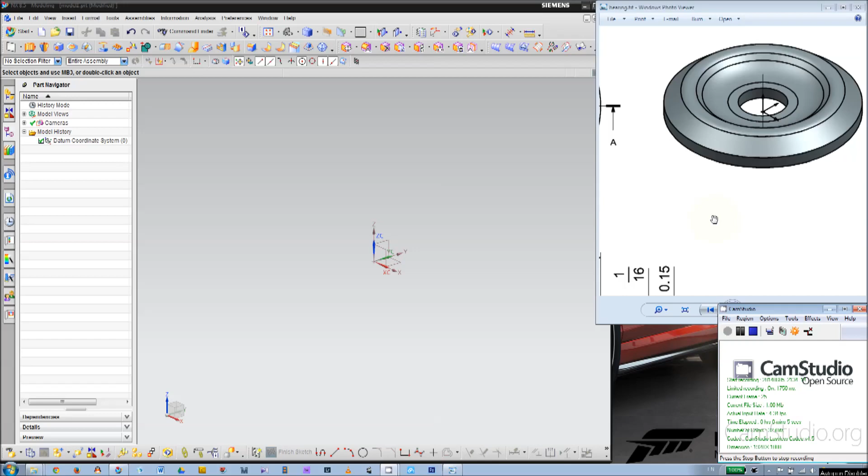Right, this is Shane, and it's a video for this bearing cup. As you can see in this drafting, the sketch is kind of confusing, so I'm gonna show you how to make this part.

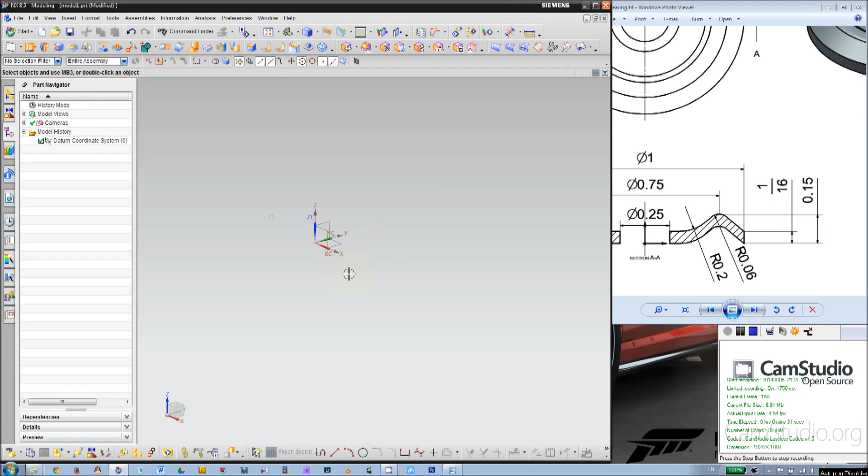As usual, you want to build a new file, a modeling file, and make sure it's in inch. Once you're in there, I'm gonna create a new sketch. Usually we think that z direction is the direction of height or thickness, so we will create this sketch on the YZ plane.

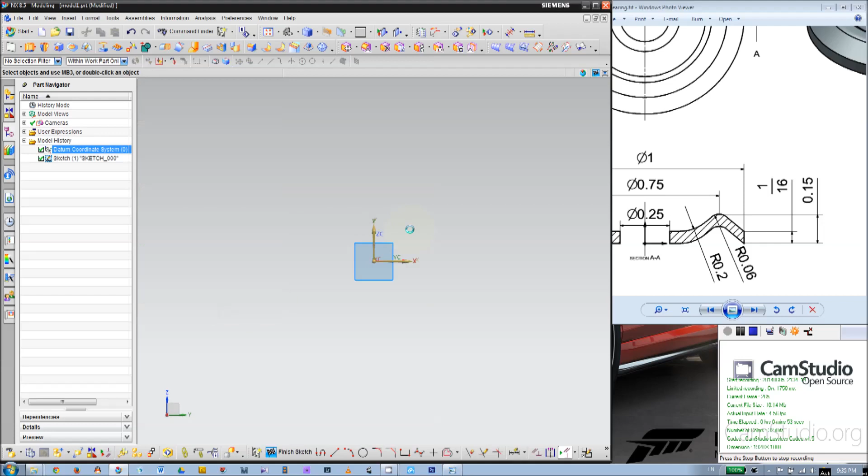Now in this YZ plane, we can start the sketch. If you look at this geometry, this is first it's revolve, and you probably can make this maybe extrude, but it seems to me it's quite a lot of work. So revolve, you only need to draw this half.

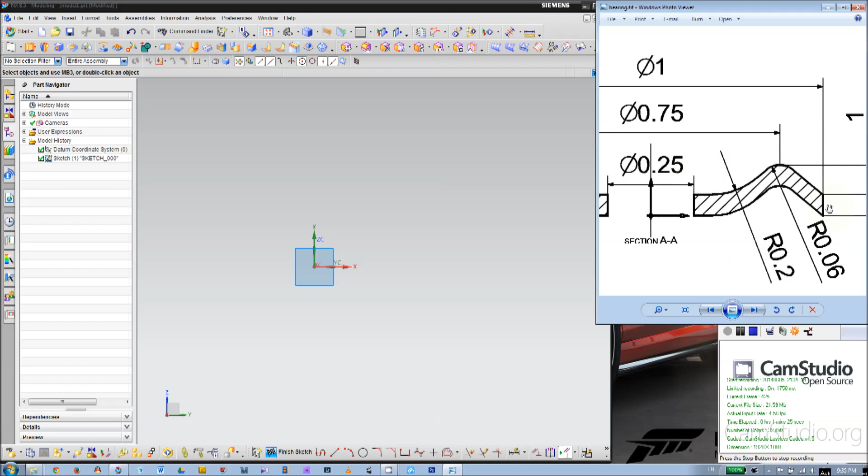About the hole, you can leave it to the last. You can extrude another cylinder, or you can make your sketch exactly like this cross section here. Alright, so that's the idea.

Let's first start. If you look at this, it's made out of sheet metal, so it should have uniform thickness across this cross section, which is 1/16, and that's what you want to make sure they have the same thickness. We will start from a rectangle from this left side to the right side.

So if let's say we choose to revolve without the hole, I'll start from the origin. Then the width will be a half of this 1 inch, so it's going to be 0.5, and the height will be 1/16.

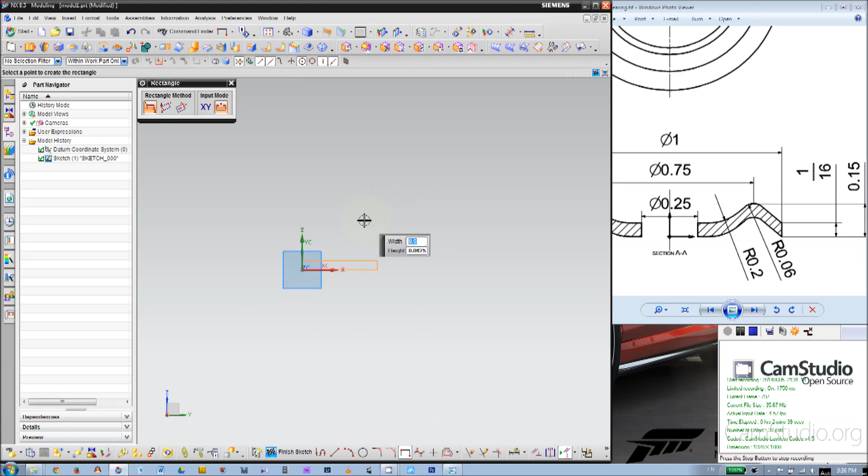Since the width moved, I need to re-enter this. Now it's there, the shape is fixed. So just a click, then you can have this rectangle.

Then we can start making this bump. I don't know how to call this, but basically this is two straight lines first, then you can make a fillet. As to this big arc here, I would use edge blend instead of fillets.

The reason is if you add another fillet here, it's probably gonna bring in a lot of under constraint. If you're fine with an under constrained sketch, then you can do that, but it's better to have it fully constrained.

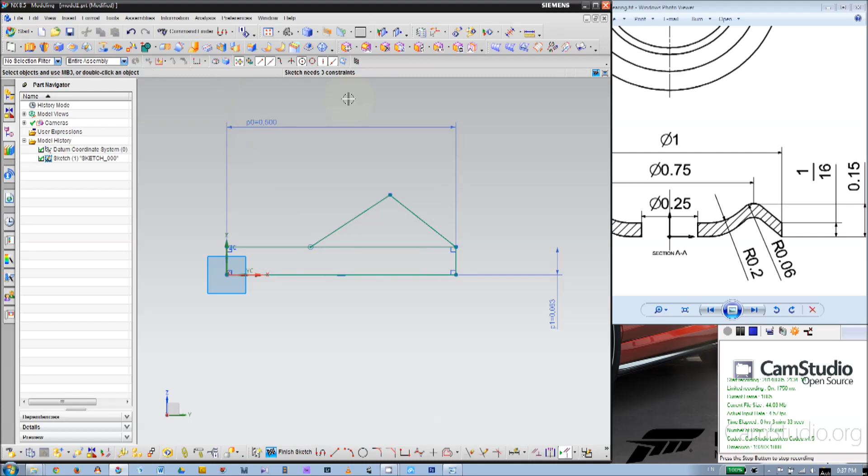Now for this bump, we have this kind of triangle here. We can add, first we can add some dimensions to define the shape of this triangle, or you can fillet first. I think fillet first is fine.

So radius 0.06, and hit enter. Now we can click this corner.

Now if you look at this 0.75 diameter, that's actually from the center of this arc, or rather the center of this - yeah, that's the center of this arc. I mean this center, not the midpoint.

I'm gonna add this from here to z-axis. Well, actually it's y-axis, it's the absolute z-axis. You're looking at the top, and the YC is your sketch axis. So that's the same thing here.

That's gonna be 0.75 divided by 2. And now you can tell it's skewed.

If you want to, I want to make this have the same angle on both sides, because underneath here you will have a ball for this ball joint, ball bearing. So you want those two sides to be at the same angle. So how do we make that?

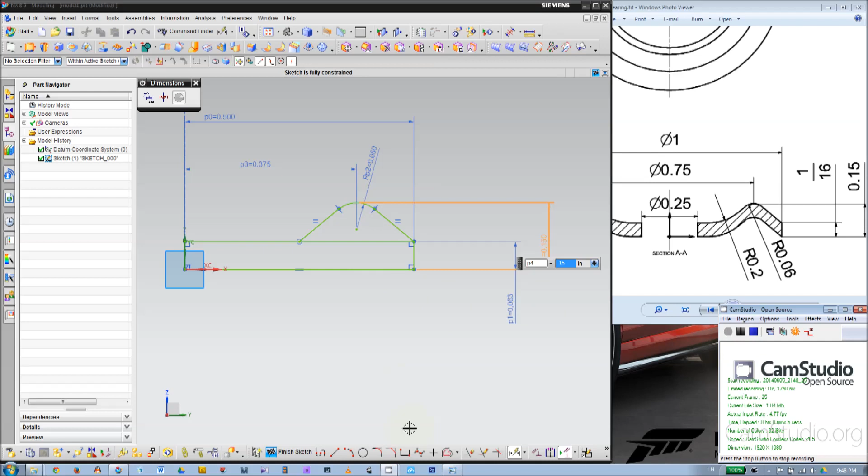Next, you just need to trim this off. So we can use quick trim and take this out. Then that's all for the top. Yep, that's all for the top.

You don't need to fillet this, or we can do that later. Let's finish the bottom, so that's exactly the same as the top.

So I'm going to make this triangle first. Then you can fillet this 0.06 for this corner. Then probably need to put another dimension for the center point of this arc to the axis.

To y-axis, you can make this equal to P3. So next time if you want to change, you only need to change P3.

Alright, next, make them equal. You don't have to go there for geometric constraints. You can simply click - notice you have this quick menu here.

So if you click one line, you would have some possibilities, those possible constraints you can apply to this line. And if I click the second line, you see the constraint changed. So between those two lines, we can have those relationships, or they can both be horizontal.

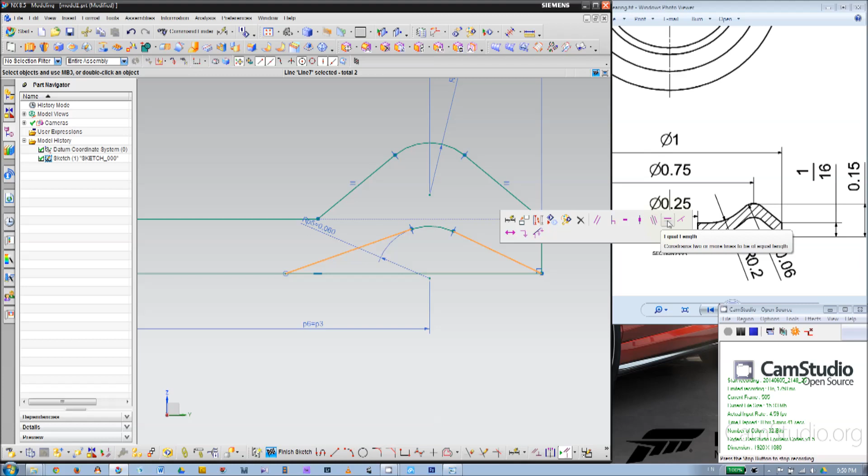So let's make them equal, which is here, equal length. And you have this.

What's the difference here is pretty obvious, and because this is sheet metal, you want the thickness to be constant everywhere. So obviously it's too thick here, so we can use another constraint, another dimension between the two centers of the arcs, make them the same as P1, which is the thickness of this sheet metal.

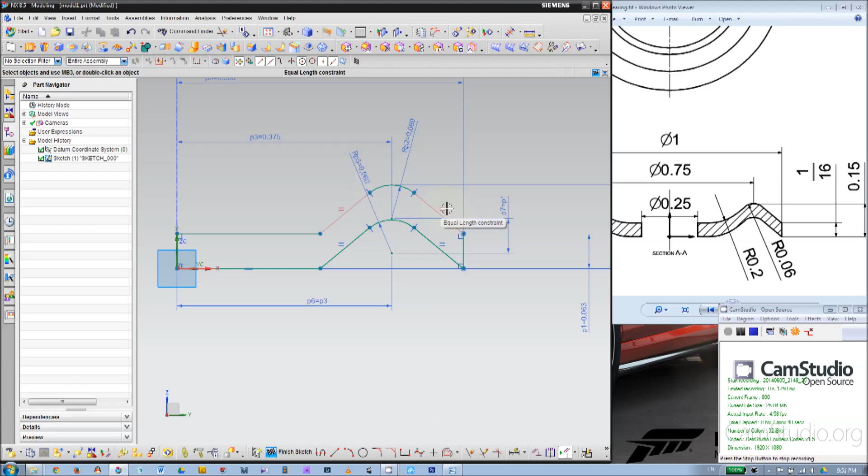Okay, so that's done. We can also trim the bottom off. Now it's fully constrained, and we don't need too many dimensions to fully constrain this sketch. So let's try to fillet this 0.2 inch.

Click this corner, click that corner. They all look fine, except I need two constraints. If you activate this infer dimension, you see this section is actually not constrained. Why? Because this line, this straight line, and that line were equal before, but now since we made the fillet, they're not anymore. So how do we constrain them now?

You can calculate how much this would be. Let's see, maybe put those two on a construction line, put this vertical, or put another construction line here, make this construction line equal to this line, and okay, I'll do it just from this line to this, and this is the original line that got filleted.

So I'm going to turn this to reference, and we need to add some constraints. First, of course, is make them equal, which is here.

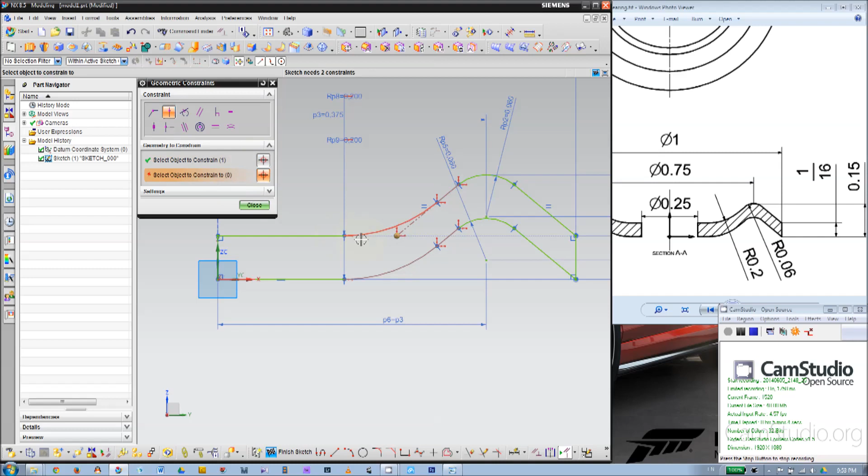Of course, another thought is you can mirror this to the left side. That should do the same thing, but I'll stay with my plan.

That is good, and we can make another line for this bottom here, and this should be a little bit easier to see how this point is not on this curve. So this is the curve, that's the point, and let's make them equal. Pick this line, pick that line, pick equal length, turn this to reference.

Now it's fully constrained. Sometimes after this step, it's still not fully constrained. Why? Because this line and this solid line are not collinear, meaning this line can actually steer away from this short line. So you might need a collinear constraint here. But since we talk about edge blend, I'll just leave the bottom without the fillet.

Then make the top as the fillet. So here we can make this back to the sharp corner, and you can use quick extend. There's a better tool called make corner. You can let two lines that are not parallel make a corner.

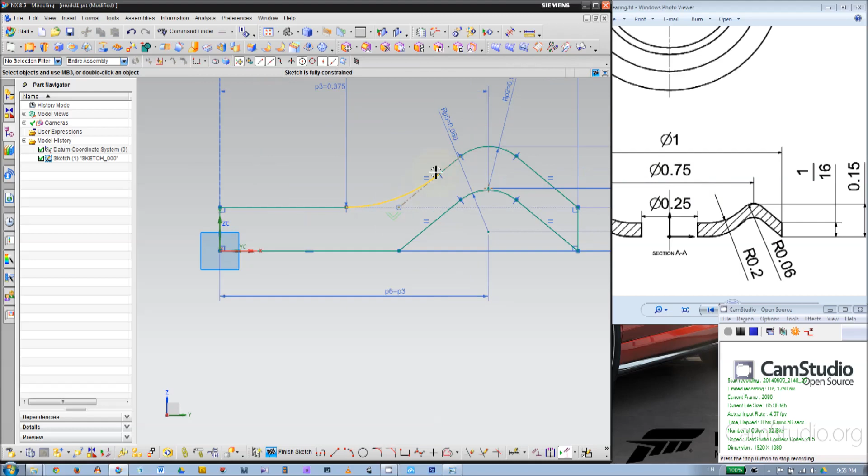And we need to put back the equal length constraint. So now it's fully constrained. The top is with two fillets. The bottom doesn't have this one.

You can use edge blend, and furthermore, you can even add this straight line here, and see this diameter. That will be a quarter inch, so this will be an eighth.

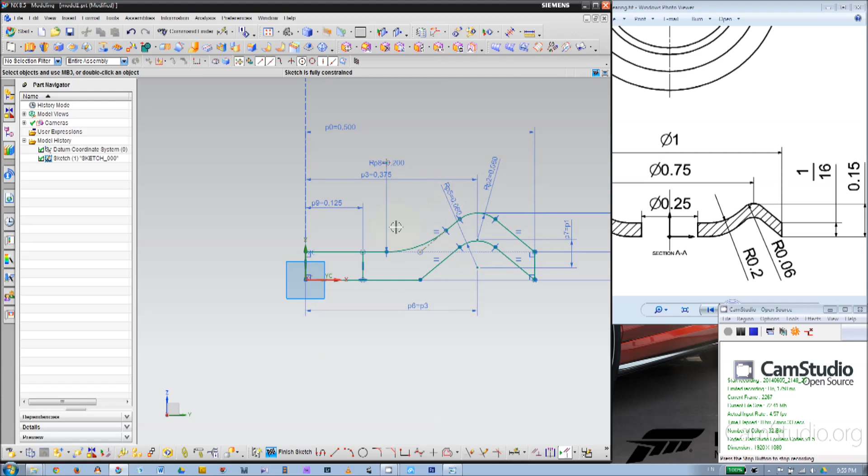Now when you revolve, you can pick this area instead of the whole thing. So since I'm not going to revolve the whole sketch, I have to finish sketch first. Then we go for revolve, and here if you choose to use inherit curve as your curve method, curve rule, you're gonna pick the whole thing.

So I'm gonna pick this one, region boundary curves. This actually picks the area. So I'm gonna pick this area.

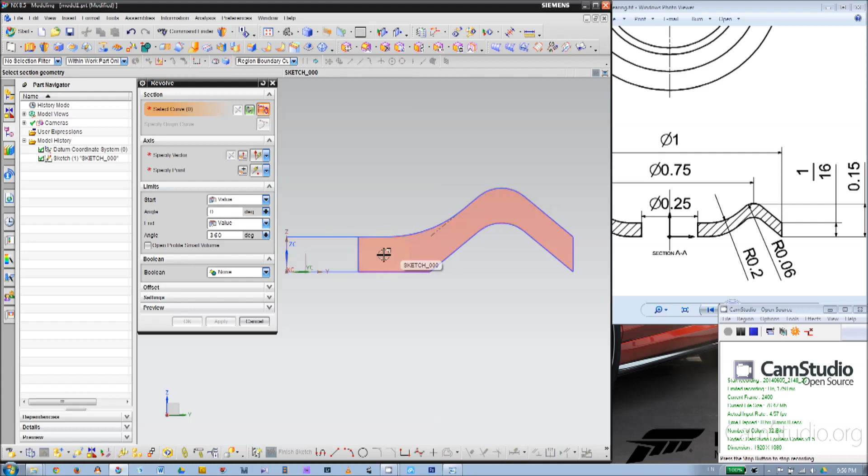Then for the vector, you can pick one Z-axis. It's already there with the direction, which is vector, and the point, which is the sketch origin. So this is a faster way to pick and revolve.

So let me deselect. Some of you might just pick a Z from here. After that, that's not enough, because you're just picking a direction that's parallel to the Z axis. So you need to define where that direction is located, so you need to specify the point, which in this case is the sketch origin.

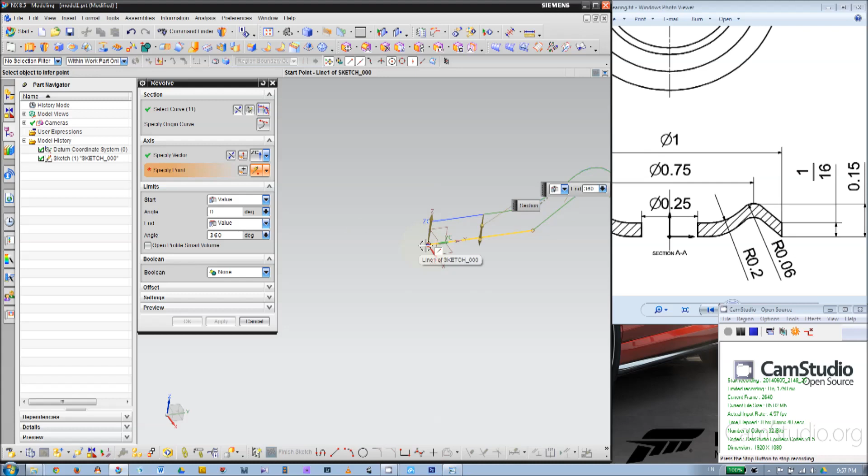So let's try maybe, as I said in the lab, you can change this point. This direction is still the same as Z direction, but the point changes, so that's why it's easier to just pick that Z, which is already there.

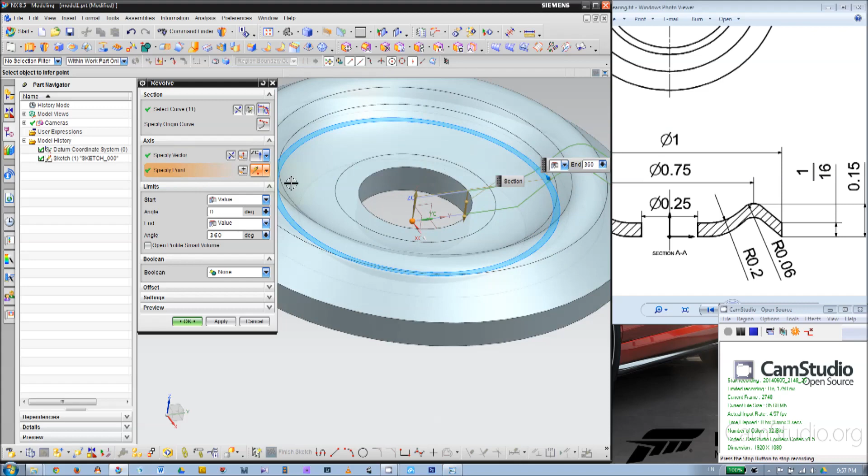Now, if you look at this, the top is good. The bottom should be the sketch without this fillet. So if you did it this way, you can use edge blend, and the radius will be 0.2. Hit enter. You want to pick this edge, then blend it. Then just click OK.

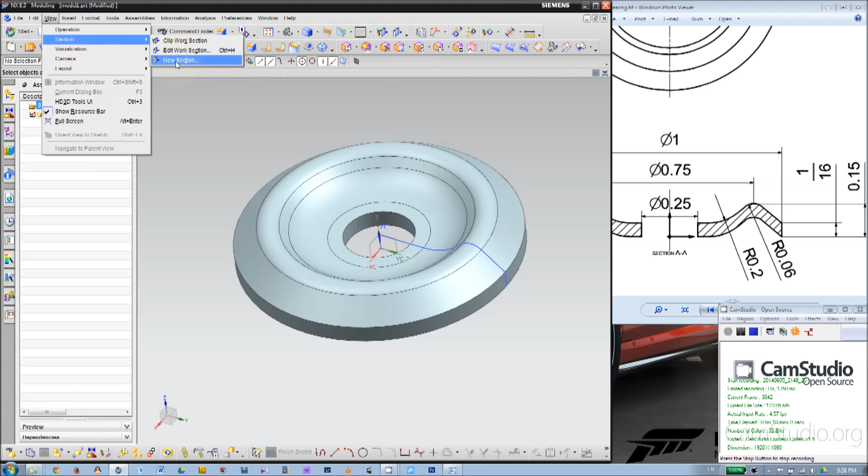Now that's the bearing. If you want to take a better look at it, you can go for View in this menu and go for Section. Here's New Section. So let's change the tab to Assembly Navigator. You see there's a section here, right?

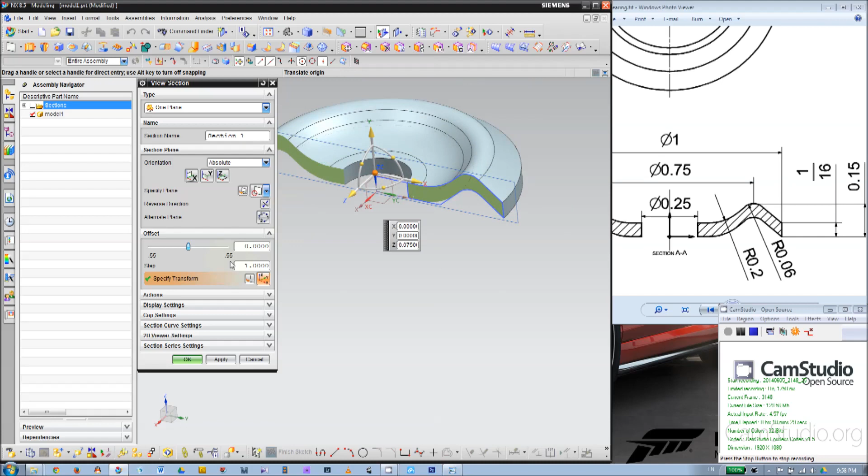So if we build a new section, it's asking us to pick one orientation. You can simply use X, Y, Z to see which one fits your need. To me, I think this one is pretty good. You can see the sketch, you can also see the solid. Once you click OK, in this Assembly Navigator, under Sections, you have this Section 1 here.

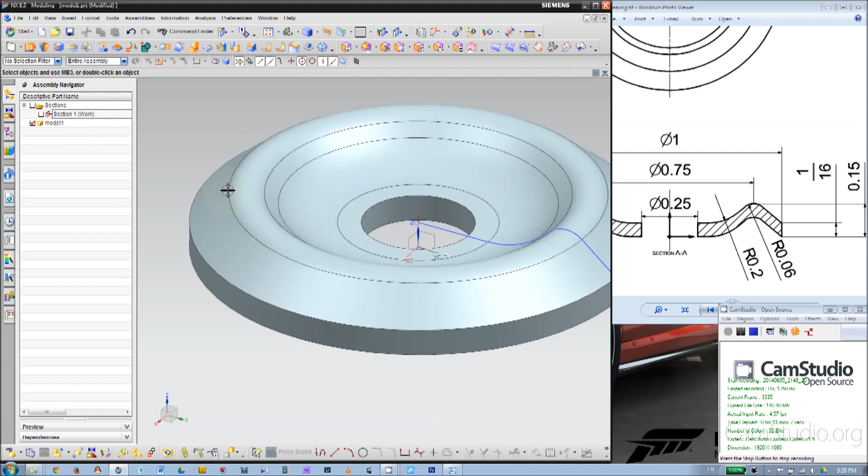If you double click, it will deactivate, and if you click again, it will show you this section view of your model. Also there's a checkbox in front. If you check it, it will show you the edge. Even if you double click to deactivate the section view, you can still see the edge. So you can also clear the checkbox, and that will take you back to where you started.

Okay, I guess that's all for this part, and you can save it.